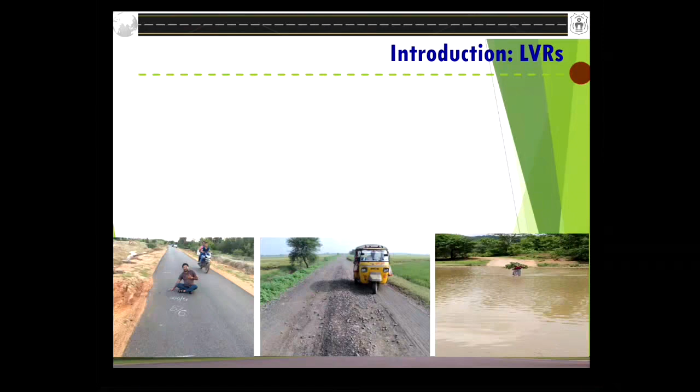When it comes to this, somebody asked what exactly is a low volume road. The nomenclature used in developed countries is low volume road, whereas in India we normally use rural roads, comprising village roads and ODRs, the other district roads. The village roads are roads within the villages. Whatever agricultural production the farmer has produced must be transported to the nearest market center, which requires a higher order category of road so they can easily reach the market center.

One of the ideas I came across in the literature for developing these rural roads in those days was to get the farmer out of the mud. That was one of the mottos. So coming to the construction and design aspect of the low volume road, I always feel it is very easy.

It is easier to design and construct a high volume road rather than a low volume road, because in a low volume road we are continuously striving for cost-effective technologies, cost-effective construction methods, and cost-effective materials, without compromising on the quality and performance of the pavement. Achieving this is not that easy.

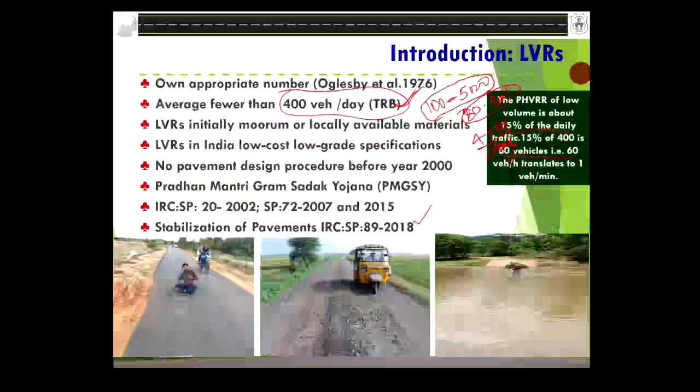Now you all worked within rural roads. Try to recall back. Are there rural roads where we are getting 60 vehicles per hour? Are we getting one vehicle each minute? Try to recall and see.

So that's why 400 vehicles per day is an accepted definition for working of the low volume roads.

So these are the photographs. Mostly you can see hardly the two-wheeler or the auto rickshaw, and this is the picture taken during our visit. A B.Tech girl, two girls of B.Tech, in a remote area village, because of lack of cross drainage structure during the seasons - this is the way they are crossing the road.

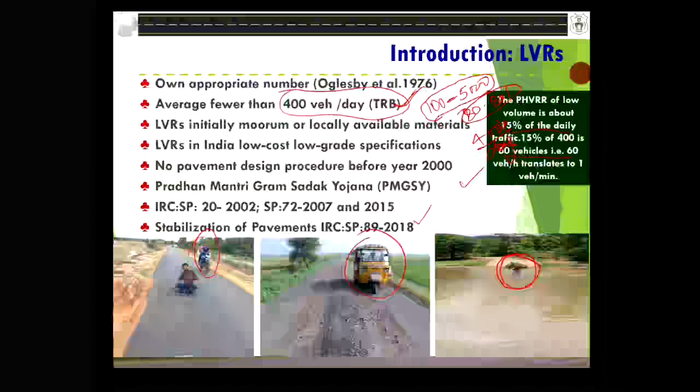We know the importance of rural roads, because livelihood, education, day-to-day activities, employment, agriculture, medical needs, whatever - all really depend upon, our life starts from the rural roads, the low volume roads. So with this background, let me proceed further.

So this is the definition of low volume roads. Another way of looking at it: low volume roads are set by the combination of the typical vehicles using a road and the traffic volume on the road. So simply, weights are divided into light and heavy, and volumes are divided into low and high, with a limit of, as I said, 400 vehicles per day.

So in this picture, please note that if you recall your traditional literature, the sound knowledge available on low volume roads is concerned only with the lower left coordinate of the graph - that's the traditional low volume roads. Whereas in most cases, we also have mining roads, sand, oil, forestry roads, which fall in the upper quadrant. This is also having low volume too. Please make a note of it.

However, the two design environments both have low volumes, but they have vastly different design vehicle weights - that's what you have to understand here. So a low volume road, such as a farm to market road in a developing country, might have a bicycle as the typical vehicle, whereas a mining road might be designed to support 500, 600, or 700 ton dump trucks.

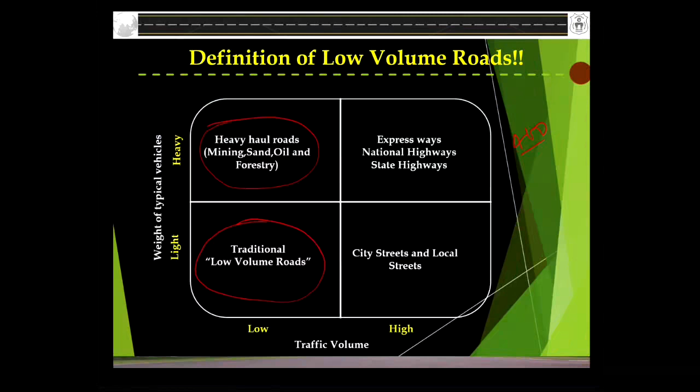So what I wanted to say is that the pavement design aspects of the two design environments are vastly different. That's why I always say that one size shirt cannot fit everyone - we have to stitch the suit as per the requirement. I cannot follow the design guidelines adapted for high volume roads; I cannot construct a 1 meter or 1.5 meter crust thickness. So it's evident that we have to design our pavement as per the requirement, without any compromise on the quality and performance of the roads. That's the background, that's the definition of low volume roads.

So how low is low in terms of traffic volume and weights - that's the concern of these points.

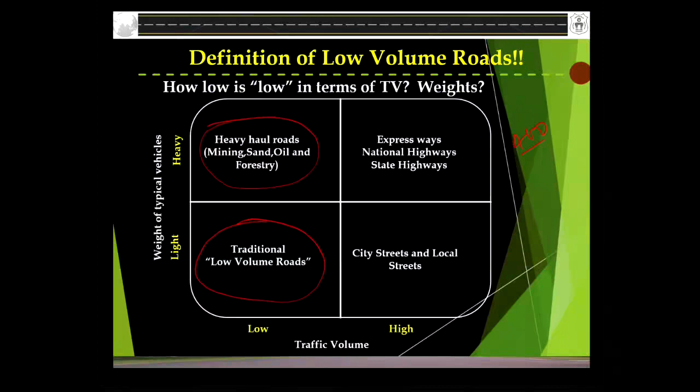So then coming to the next part, sir, talking about the specifications. Before the year 2000, very little sound knowledge was available on the planning, design, construction, and maintenance of low volume roads. But after that, once the rural road PMGSY scheme was started, the first ever kind of manual, the SP20, was published in 2002. The rural road manual IRC SP20 was published by the Indian Roads Congress as the first technical document, and subsequently the National Rural Road Development Agency was constituted for the purpose of providing technical and management support to the Ministry of Rural Development.

Subsequently, we have gotten a very good number of code books, followed by the design and construction of cement concrete pavement for rural roads - IRC SP 62 2004, and the flexible pavement IRC SP 72 2007. Now we are using IRC SP 72 2015, the latest code.

All these code books provide technical and management support to the MoRD. Later, as you are aware, in this process they also developed a standard bidding document, and the quality assurance handbook volume 1 and volume 2.

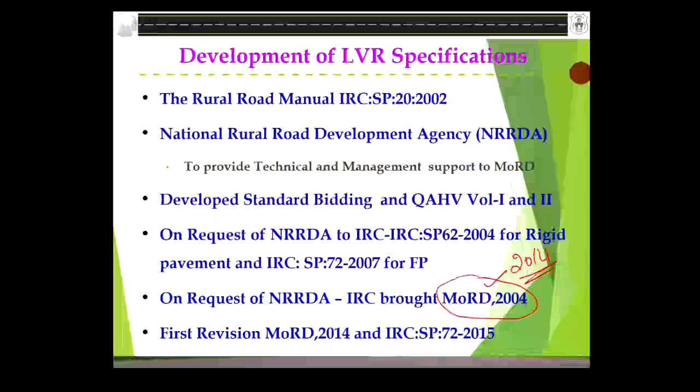During this one decade, there was a lot of development in the country, a lot of experience gained by engineers like you, and a lot of international exposure. That necessitated incorporation of locally available materials, marginal materials, and different road safety aspects into the codal specifications, which necessitated the first revision in 2014, and we are now using IRC SP 72 2015.

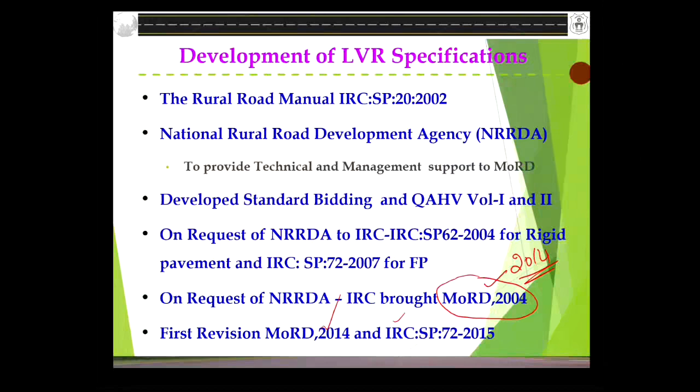So this is the need and the little background of the MoRD specification - why they needed a change and all those things.

Now, before I move into the specification part, let me give you some idea - what quality works mean, and what the role of specifications is.

Sir, everybody feels - what is civil engineering? Anybody can do it. Moreover, when it comes to road infrastructure - what is road? Just excavate one or two feet, bring some material, dump it, compact it, and leave it. Everybody can construct it. But you know what makes a construction specification important, all those things.

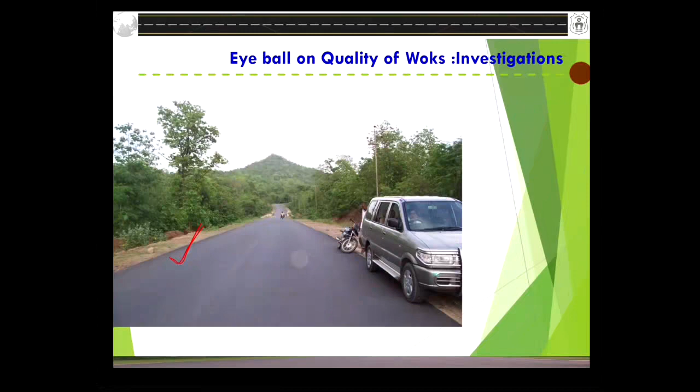This road was constructed and awarded for third-party quality control testing to NIT Warangal. The transportation division does a lot of consultancy on third-party quality for different agencies, so they requested us to do a third-party quality check. We inspected this road and found it to be very good, excellent, no doubt about it. But at some chainage...

While we were traveling or walking on this road, we noticed that there was a small crack that had been initiated on the top of the surface.

Then we asked the engineers what could be the reason, because the entire road had excellent riding quality - we had not found any small crack anywhere else, but this crack was given as a point of concern. I asked the engineers, can we investigate this and see what the problem is? They said it may not have been properly compacted, and this area is mostly blessed with black cotton soil, so the compaction caused the problem in the subgrade base layers. They said they would correct this.

Now, in your opinion, what could be the reason for this, sir? With your experience in the field, is there any clue? Can anybody give a clue? What could be the reason for this, or what is your idea? What is your thought process? Why was this crack initiated?

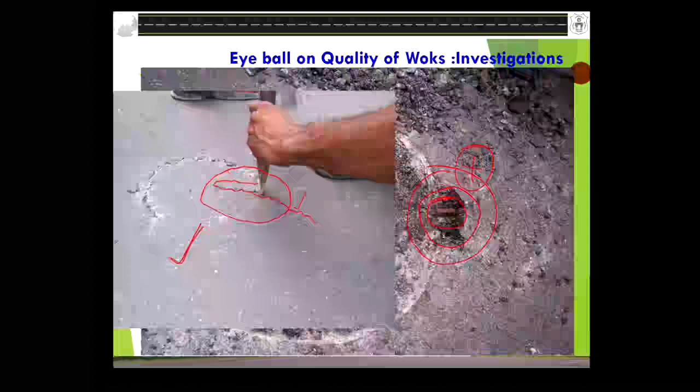So what I'll tell you in the next one or two slides, what are the things in it. We must be very careful while executing the work. See that there should not be any foreign material present in the mixes. Maybe a silly reason, but now this has initiated. This has caused the cracking. That's what I wanted to convey to you.

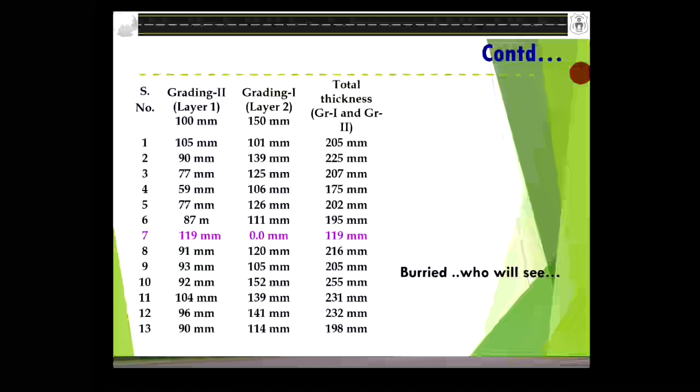And there is a second experience for us. Everybody feels that a road is a structure. We need to bury some materials into this, compact it, and forget about it. It's a buried structure—who is going to worry? You and me, we are going to worry. You and me are going to think about this.

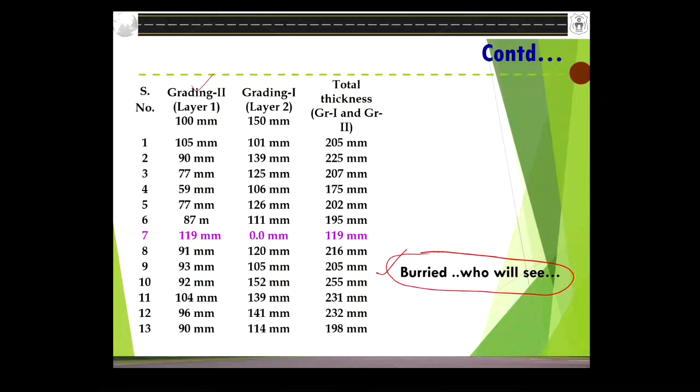So this is another kind of work that we have carried out in Warangal on a consultancy basis. This is the road having two layers, grading 2 and grading 1, layer 1 and layer 2, of 100 millimeter thickness and 150 millimeter thickness, and together it is supposed to be 250 millimeters. Look at the specifications—nowhere is it exactly 250; either it is more than 250 or less than 250. Except this one case, which is 255.

And look at this picture highlighted. At this juncture, the contractors even forgot to lay one layer.

This was a different story. He said that you did not perform the test in our presence. No, nothing happened like this. It was a discussion, but this is the reality. So specifications or material make a lot of importance, a lot of concern for all of us.

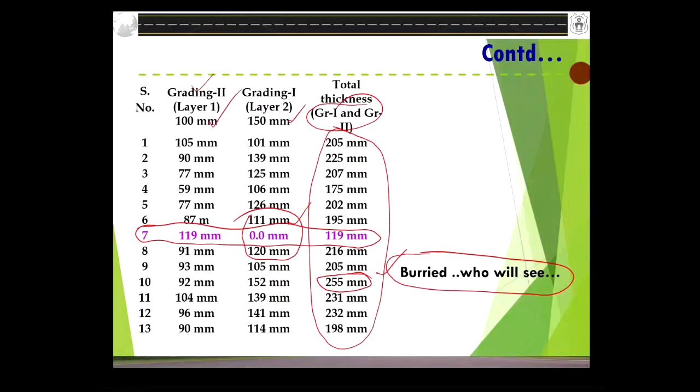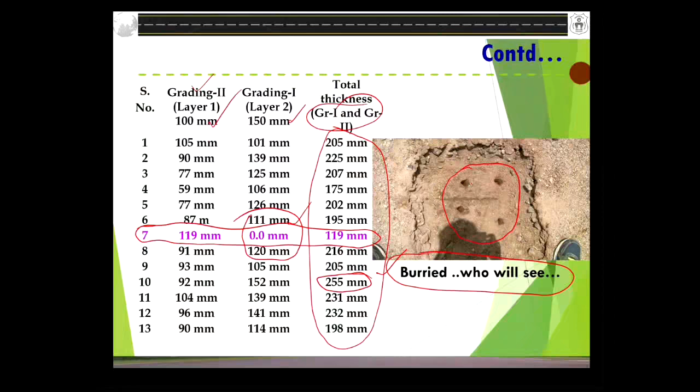So this is the picture. I have excavated the first layer. In the second layer, I myself took a crowbar and tried to hit into the layer where it was. Simply it went penetrating into it, but I could not feel any aggregate present in it. So this is the zero.

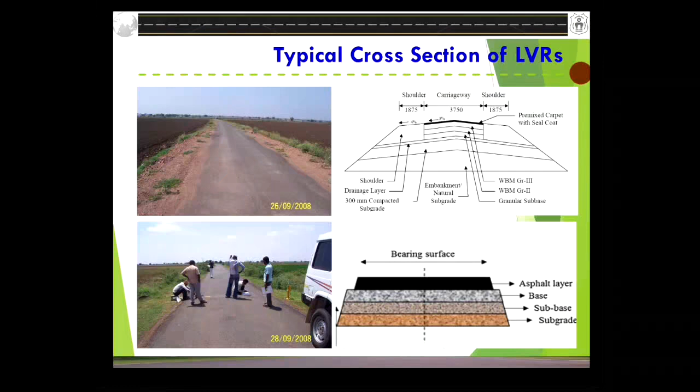So with this background, sir, let us—you and me, all of us—know that these are these typical rural roads, which these photographs show. Yes, we took the photographs during our RRPPS studies. RRPPS, the study initiated by NRIDA from 2007 to 2012. So these are the roads, and most of the engineers have been associated with PMGSY from day one, from the inception. They are very much familiar with this kind of pavement cross sections.

So we used to have a standard cross section like a subgrade, embankment, and subgrade followed by a base or subbase as WBM grade 3, WBM grade 2, as well as a granular subbase course. And the 3.75 meter is the carriageway width on this. This is the typical cross section.

So now in the latest codes of practice, there are a lot of things, a lot of developments and changes that have come into the different layers. Use of marginal materials, locally available materials, and use of cement-treated bases—all these things have been incorporated, and we are witnessing this today.

So our entire life will be revolving around these layers—what should be the best material, what should be its properties, how they withstand different traffic and environmental conditions. Our life is going to revolve around this pavement cross section, and see that at the end of the day, the road serves the purpose for which it was designed, intended, and constructed.

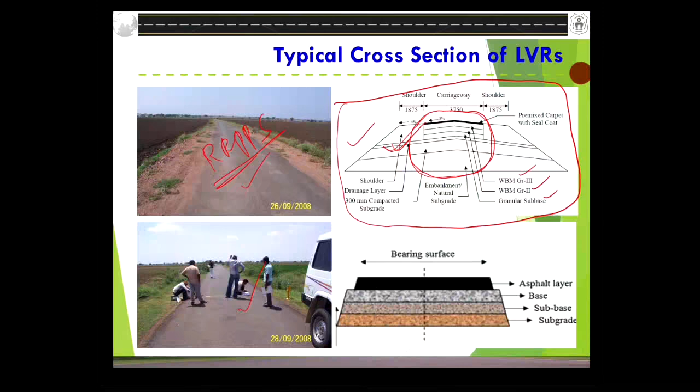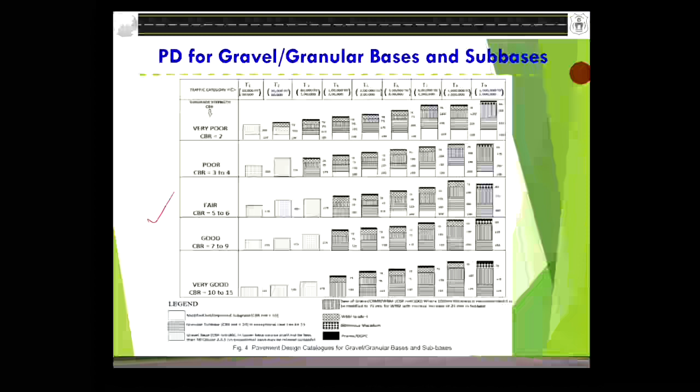Now let me give you a brief idea. Let me go further now. What are these supplements? New supplements that have been added from the 2004 MoRD specifications to the 2014 MoRD specifications. What are the general changes in the MoRD specifications?

So these are the sections. Section 400 and 402 supplemented within gravel and soil aggregate subbases. Section 408, 410 on local and industrial material, which were not there earlier. So this has been incorporated.

Also the semi-dense bituminous concrete and waste plastic has been put in place now. And also followed with structural steel, vented causeways, bridges, long span bridges, their bearing aspects, CC road maintenance, traffic signs, and most importantly, material, environmental, and social safeguard, which is a magic term we are calling road safety.

So in terms of that, how to safeguard the environment and social safeguard, few aspects have been incorporated into this. In addition, a lot of quality control tests and quality control equipment have been added to the latest code of practice. I will be highlighting these changes wherever they are done, and whatever is not highlighted or listed is as usual maintained and continued from the earlier code of practice to the current one.

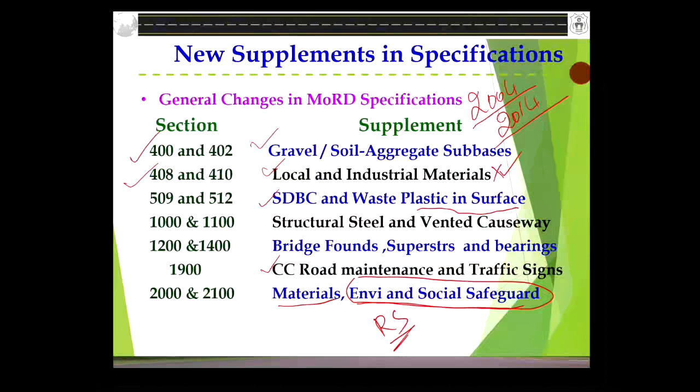This code of practice also found two bituminous constructions phased out. One is the built-up spray grout, as well as the modified penetration macadam. The built-up spray grout was recommended as a base course, and I think it is a 2-layer composite construction with single size aggregate, which is compacted on them.

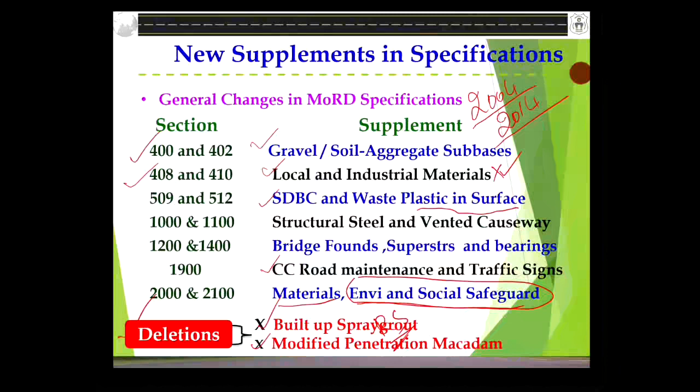Both these were found to be susceptible to penetration, open kind of mixes, and water gets entrapped in them. So this has not found any place in the latest revision of the IRC MoRD specifications of 2014. And this is also given.

I was telling you what are the materials - embankment, subgrade, unsuitable materials, and the requirements. Sir, I was showing the case study on unsuitable materials and how to be careful. If you present any kind of foreign material, such kind of things, those were the results.

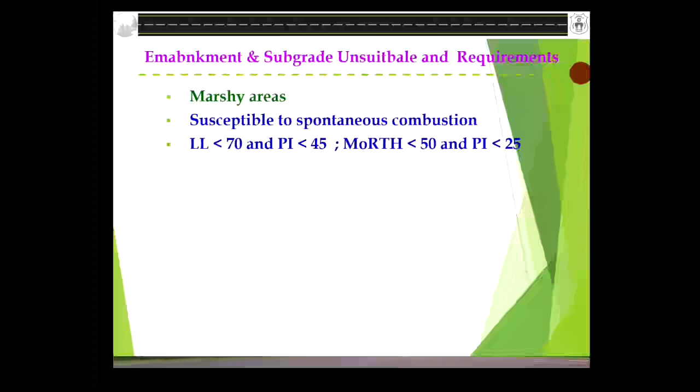So material from marshy areas is not recommended. They should be free from peat or perishable and other organic materials. Also, the material should not be spontaneously combustible. And they said liquid limit should be less than 70% and plasticity index less than 45. If you look at the MoRTH specification for higher order roads, they say liquid limit, the Atterberg limits, should be less than 50, and plasticity index should be less than 25.

Also, soils having salts, which we call sodic soils, having a pH value greater than 8.5, are not at all suitable, not at all recommended for any subgrade or embankment construction. Also, free swell index - a soil having free swell index more than 50% should not be used as fill material.

In case you feel there is no alternative and you have to use it, the code has given a concern: on top of the 500 mm portion of embankment, and below the subgrade, you have to ensure it should be non-expansive in nature. That's what they have mentioned.

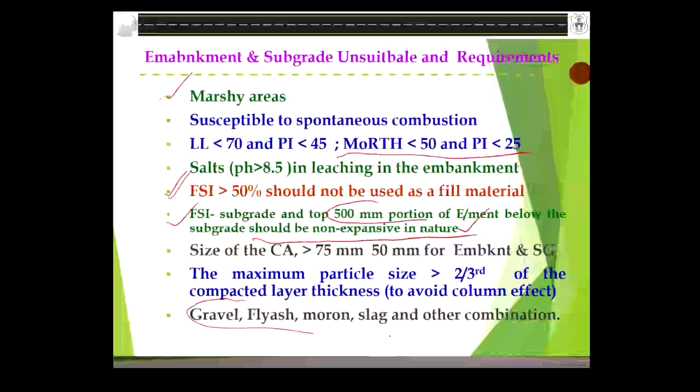In the embankment and subgrade, the common materials used are soil, moorum, gravel, fly ash, slag, or any other material, or a mixture or combination of these materials for construction purposes. When using these, the density requirement for compaction of embankment and subgrade applies - for embankment not subjected to flooding, embankment subjected to flooding greater than 3 meters height, and also subgrade, earth shoulder, and backfill.

You can see here 14.4 kilonewton per meter cube. This is the maximum laboratory dry unit weight when tested as per our IS Proctor test. So they said that 14.4, 15.2, 16.5 kilonewton per meter cube respectively should be maintained and should be obtained.

So when it comes to compaction requirements, for subgrade and earthen shoulder, it should not be less than 100%. When it comes to the embankment, not less than 98%. Whereas in the earlier code in 2004, they said it is 97%, but based upon the experience and performance of the things, they said it must be 98%.

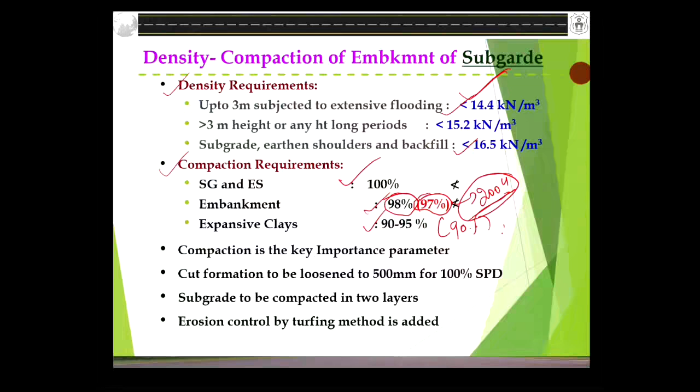Similarly, we know that expansive soils are predominantly the BC soils. They behave very erratically in summer, erratically in winter, in different seasons. For them, earlier it was mentioned only 90%, if I'm not mistaken. But in the latest code revisions, they said the range has been given as 90 to 95% for expansive clays.

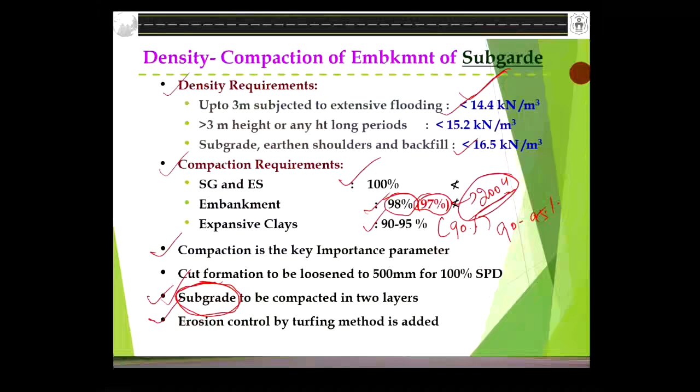Now, when it comes to layers from the top, the embankment and subgrade, the next layer is our GSB layer. As I told you, our entire life as an engineer will revolve around using this kind of traffic. So we know the subgrade, subbase, base course, followed by a bituminous course, whereas in rural roads now people are using SDBC or BCU in some areas.

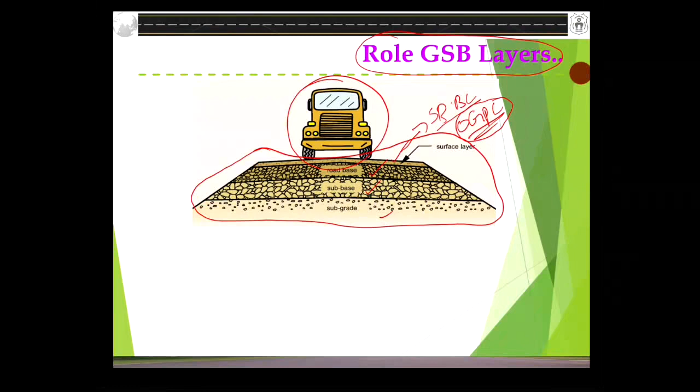But earlier, predominantly we used an open graded premix carpet of 20 millimeter, which is not treated as a structural layer - it is just a dust palliative layer, and there is no mix design procedure. It is simply a recipe of mix, adding some 3 to 3.5% bitumen on those things. We will cover this part a little later on the third day.

Now let us consider this - what are the functions and role of the granular subbase layers? You are aware the main function is they should provide drainage stability.

Sir, if you recall our undergraduate level course on transportation engineering, pavement engineering or highway engineering, we go from the bottom to the top using low quality material moving to superior quality materials. Predominantly in the subbase layer, we use slightly inferior quality material, whereas in the top surface and base course, we use very superior quality material as they take the load directly from the traffic.

So their role is to distribute the traffic loads coming on the different layers safely onto the subgrade without any excessive deformation, rutting or damage of the pavement. The subbase is predominantly provided as a drainage layer, and we also need to take care of the capillary effect, that is the saturation of subgrade due to the groundwater table. The other layers should also protect the subgrade, reduce the stresses coming over it, and improve the load bearing capacity. Also, one more important point is the initial stages.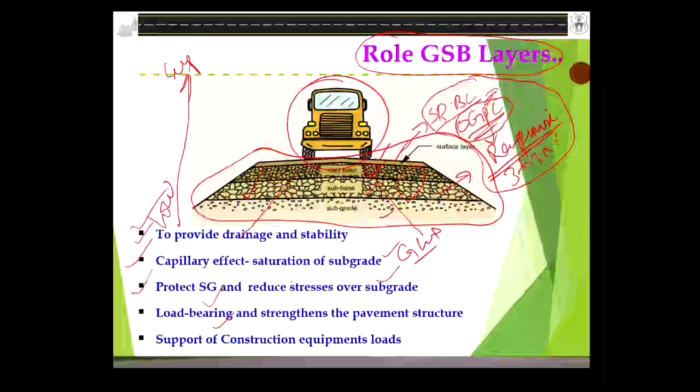There are some sites, some areas, which are not even capable of supporting initial construction traffic. So they should provide support for construction equipment and construction loads. To fulfill these objectives, we use different kinds of materials. What are those materials? These are the materials you're all aware of.

Natural sand, crushed gravel, crushed stone, crushed slag. Natural sand is a rock mineral finer than gravel in size. Crushed gravel is also similar to crushed slag. There's crushed stone, and crushed slag, which is obtained from the steel industries and such places.

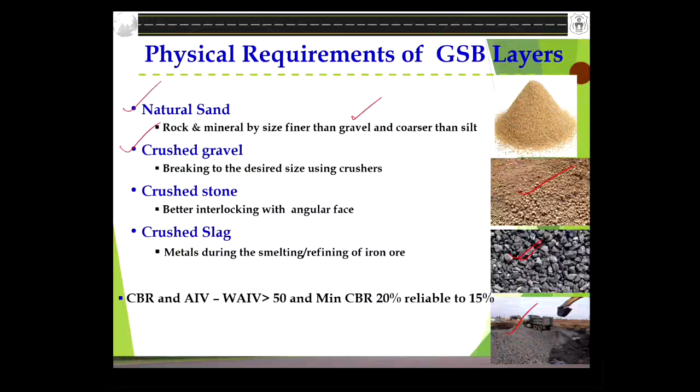Also, we consider the CBR and the wet aggregate impact value. The wet aggregate value should be greater than 50, and the minimum CBR is 20%, which is relaxed to 15%. What does this mean? We said that the CBR value of the sub-base should be 50%, or 20%.

In some areas, it may not be possible to get good quality materials. In those cases, the code has given a relaxation that the reliability can be up to 15%. In areas where only soft aggregates or soft local materials are available for construction, the code recommends performing the wet aggregate impact value test under 72-hour soaking conditions. After the 72-hour soaking, if the wet aggregate impact value is still greater than 50, then that material can also be used in the construction process.

So you have to remember all these things. As Professor Prasad sir mentioned in the morning, there has been a lot of development in rural road construction technologies today. We are all facing a crunch, a natural scarcity of pavement materials. I'm sure if you move another 30, 40, 50 years, we will definitely be facing severe scarcity of pavement materials. We are witnessing this already, as those involved in the PMGSY scheme from Phase 1 since its inception till today are aware.

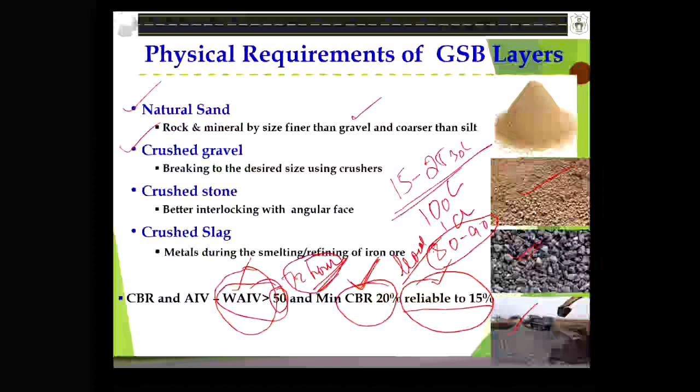So on one side, this is the issue. On the other side, the country is abundantly blessed with alternative local materials. But fortunately, unfortunately, as I always say, God has not created all of us the same height, weight, and color. So whatever material is available cannot be straight away used for construction, unless we make a little effort in treating these materials—at least 50-50 replacement or 60-40 replacement, something like that. Then we can save nature, save cost, and also save the future younger generations, so they don't say 'my father and mother used up everything on this planet and left nothing for us.'

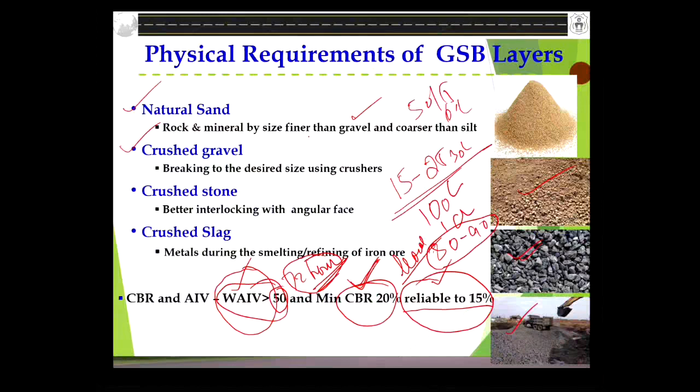So that's the requirement behind using natural sand, crushed gravel, crushed stone, and such materials.

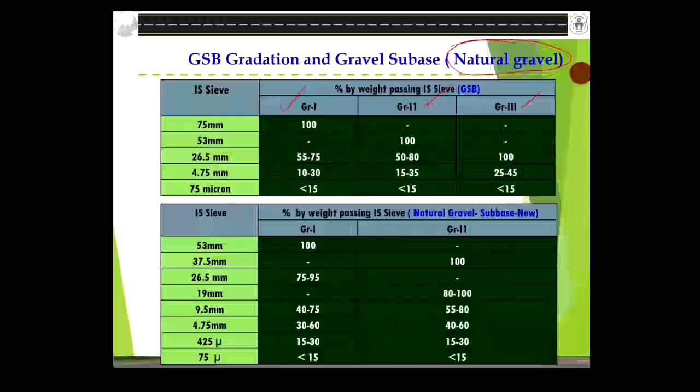Moving further, the latest code of practice has introduced two new gradations: the granular sub-base gradation and the gravel sub-base. This gravel sub-base is the natural gravel type—grade 1, grade 2, and grade 3—also for the sub-base layer. Grades 1 and 2 are the natural gravel within the sub-base. This is a new incorporation in the granular sub-base layer, and you can see the corresponding sieve sizes and gradation sizes.

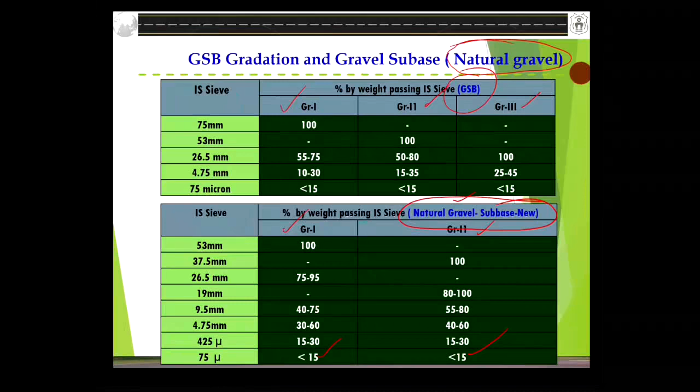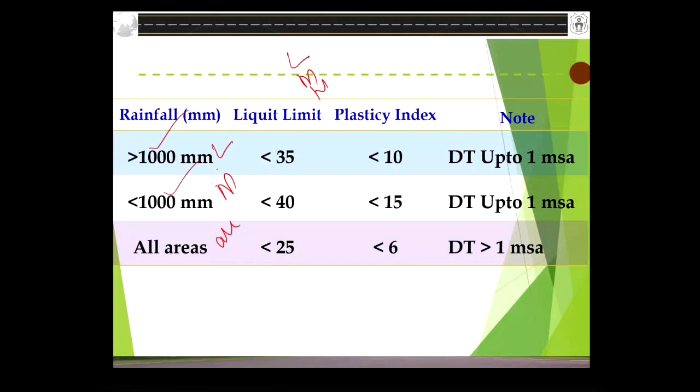They also specified that for clay subgrades, the material passing the 75 micron sieve should not exceed 15%. Also, they have given rainfall categories—earlier this table was not there. For this gradation, they have given three rainfall areas: low, medium, and high rainfall, classified as greater than 1000 millimeters or less than 1000 millimeters. Irrespective of the area, your Atterberg limits and plasticity index values are specified, along with some notes given accordingly.

For this, you can design for traffic up to 1 million standard axles, and also design traffic greater than 1 million standard axles. As I told in my opening remarks, in India, low volume road means a road carrying up to 2 million standard axles, as per IRC SP 72 2015, the latest version. As per IRC SP 72 2007, it was 1 MSA.

If you recall IRC SP 20, we have categories A, B, C, D, E up to 450 vehicles per day. This was the year 2000. Now we are also calling the minimum a road which carries 2 million standard axles. In the earlier code, if any road exceeded 1 million standard axles, we used to recommend either designing it for 1 million standard axles using the same code of practice, or going for IRC 37 2012 or 2018 for flexible pavement design.

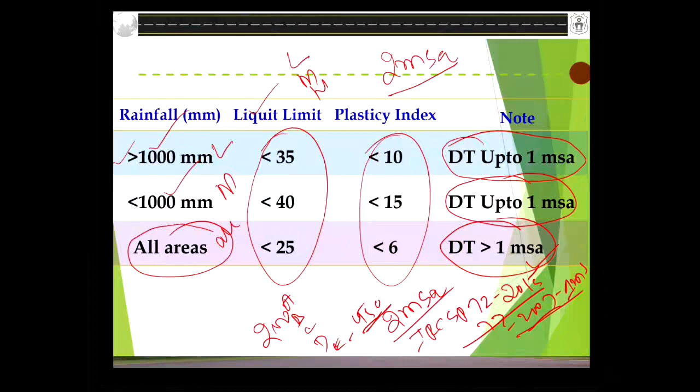Which is not my cup of coffee as far as rural roads are concerned. So now also, a road which exceeds 2 million standard axles - I don't see that happening except in rare cases, like an industrial area, or sand quarries, iron quarries, or something else. Otherwise, there's no question of rural roads exceeding 2 million standard axles if you properly establish the traffic volumes and do systematic, scientific analysis. But this is the guideline that has been given to us.

PI for the granular subbase layer, which has been newly incorporated into the code of practice. Here also, minimum CBR is 20%, and if the granular subbase doesn't meet the economic needs, they said 15% relaxation has been given for engineers to take care of those things.

Another new incorporation is a modified definition for gravel. The new modified definition says natural gravel - if you try to have it, it will be not less than minimum 30% CBR, up to 80% CBR kind of materials available. So natural gravel is a mix of crushed stone, crushed gravel, crushed slag, moorum, sand, fine-sized particles, or any combination of these. This is the definition given in the new guidelines.

As I told you, we have a classical cross-section of the flexible pavement. In the subbase layer, which is supposed to be a drainage layer, they have divided it into two parts: lower subbase and upper subbase. The lower subbase acts as a drainage layer, and the upper subbase acts as a separation layer, with minimum lower subbase having 50% CBR and upper subbase having 80% CBR.

Here also, the wet aggregate impact value shall not exceed 40 and 50, 40 and 30 respectively. Flakiness index 25 and 20% for base and surfacing courses. And in this, if by any chance the required material - gravel, soil aggregate mixes as subbase material, base course, and surface material - fails to meet the requirement, they say go for gradation by blending. That blending by crushing, screening, and mixing should be done mechanically, by in-place mix method, as recommended in the MoRD specifications.

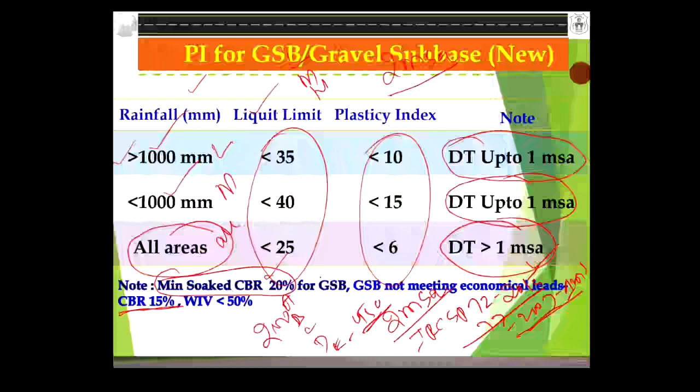Right, okay. Now, earlier I said that the sub-base course minimum CBR value is 20%. For the GSB, if it is not meeting the economical need, it is relaxed to 15%.

Now, in this code, what is gravel or soil aggregate? Gravel or soil aggregate sub-base, base, and surface course also. In this case, the sub-base is included in the new revision. This sub-base includes two things: lower sub-base and upper sub-base. The lower sub-base acts as drainage, the upper sub-base acts as separation. This material should have 50%, and this material should have 80% in case of the gravel soil aggregate mixtures.

That's what the inclusions are. But naturally we are using very superior material in the sub-base. Actually, we must use a bit inferior material, which must have CBR at least up to 20%. But if we are using material of CBR up to 80, then we are not economizing. Yes, that's what the code has recommended right now.

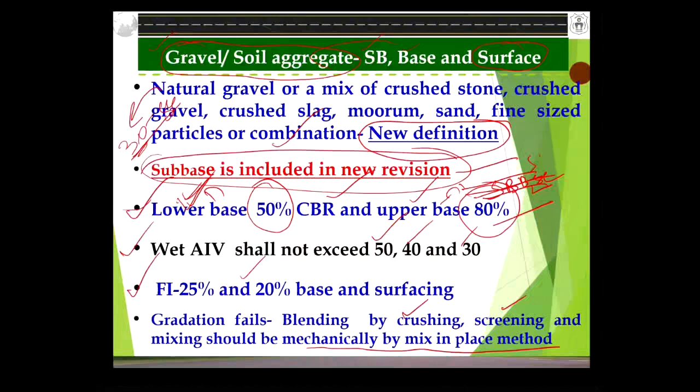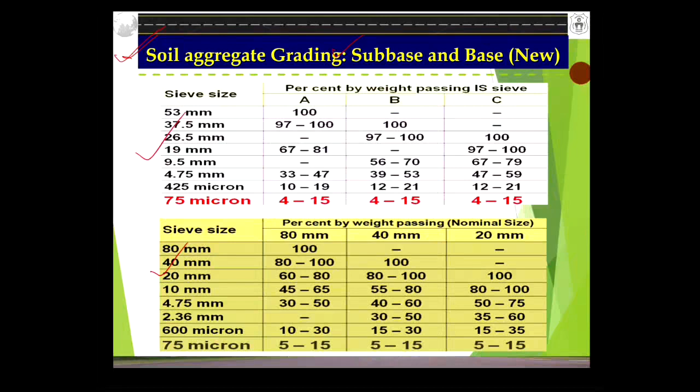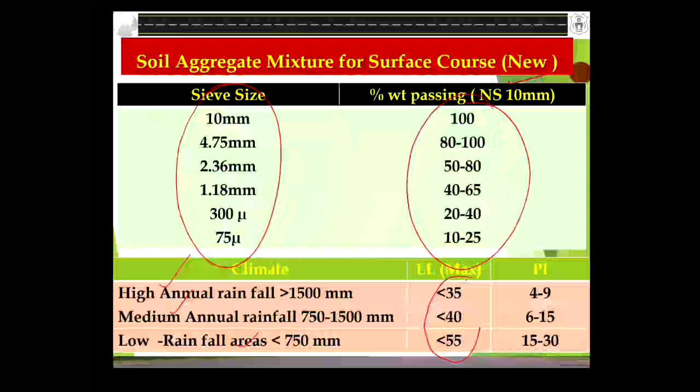So let's move further. This is the aggregate gradation for sub-base course and base course. This is a new inclusion compared to the 2004 and 2014 codes. There is also a soil aggregate mixture for the surface courses, with a nominal size of 10 millimeter, given for high rainfall area, medium rainfall area, and low rainfall area. It has to meet the liquid limit and plasticity index requirements. So this is what about the changes incorporated in the code of practice of the MoRD specifications.

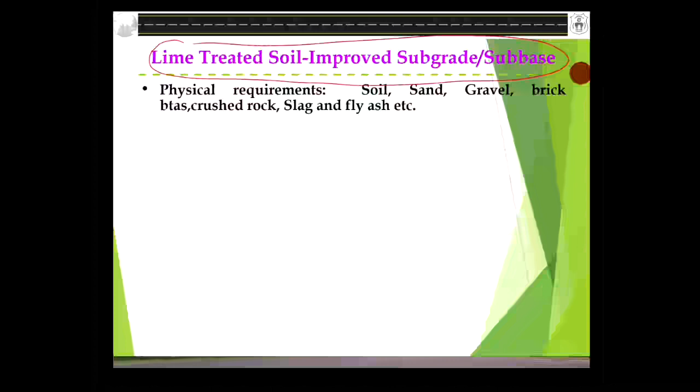Now comes the lime treated and soil improved subgrade. As rightly said, wherever material scarcity is there, when you are using locally available material which is not meeting the required specifications, the code recommends treatment of the subgrade, sub-base, and base courses. In this requirement, they give physical requirements for soil, sand, gravel, brick bats, crushed rock, slags, and fly ash.

Earlier it was mentioned as cement treated sub-base and base course, but now in the new revision, they say cement stabilized sub-base and cement stabilized base course. They also give ranges: if using cement stabilized bases and sub-base courses for sandy soil or soil gravel, the soil cement range should be 3 to 5%. Silty soil with plasticity index greater than 30 is 4 to 8%. Clay and BC soils are 8 to 15%.

BC soils with PI greater than 30 must be addressed with two-stage stabilization, that is lime stabilization as well as cement stabilization. Soil which is not responding, not getting improvement with lime, you can go for a second treatment with cement stabilization, adopting this tentative approach.

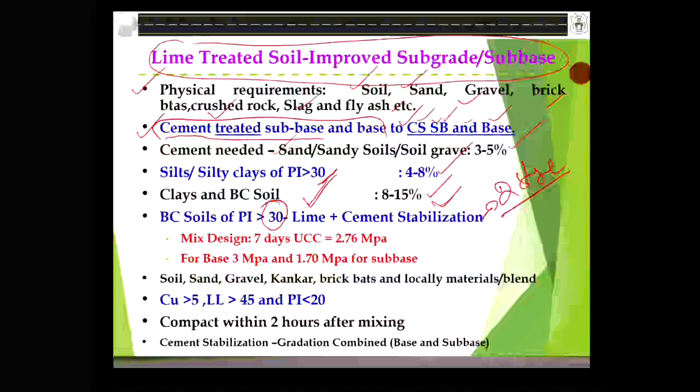This is the range of values given for cement content. Also, the mix design for lime treated material must be confirmed in terms of UCS value. Mix design 7-day UCS is turned 2.76 MPa for base, 3 MPa, and 1.7 MPa for sub-base courses. Also, soil, sand, gravel, kankar, brick bats, and locally available material can be blended, and compacted within 2 hours.

The cement stabilization, earlier the code had given something different. In this code, they have merged into only one table, starting at 53, 37, 26.5 for the base and sub-base courses. The cement stabilization has been adapted.

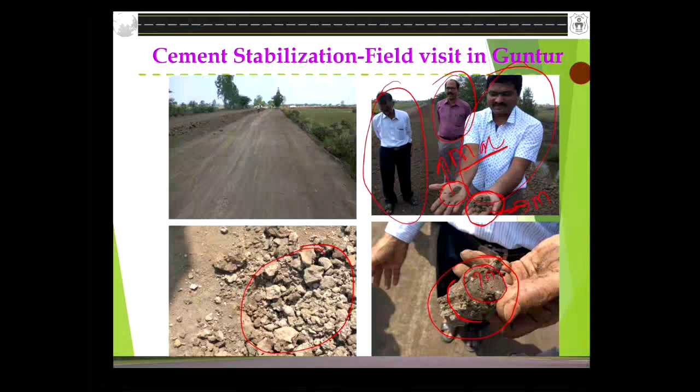Is it the fault of the engineer, or the fault of the mix design, or the fault of the execution? Nothing. What we feel is, in India, even today, if we want to do a stabilization with cement or a chemical or bitumen stabilization, unless we have state of the art machinery equipment which can pulverize this kind of clods into powder form and add to the cement, I think we will get this kind of results only.

That's my gut feeling. Unless we use state of the art machinery, right now what we are using is hardly rotavators, or hardly disc harrows, or tractor-towed cultivators.

But these cultivators have got their own limitations. They may not be pulverizing this material to the required powder form. So this is also one of the main reasons for the non-success of cement stabilization or lime stabilization, especially when dealing with problematic subjects like expansive soils or BC soils.

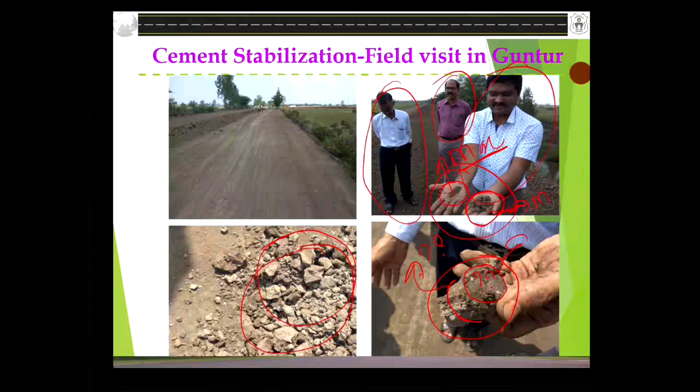Finally, we have recommended something to them. They have done it, and after that we also asked them to include geotextile materials so that it enhances the pavement performance. Some solution has been given, but this is the reality and this is the fact.

That is as far as that concern goes. And as far as the granular courses are concerned, for sub-base and base course, the traditional things - WBM sub-base and base surfacing - no changes. WMM as a base course is adopted. One new thing is these two things which have been added.

We will discuss more about these two things in terms of marginal materials or industrial materials - how to characterize them, what are their properties, what are their quantifications. We'll talk on the third day, in the last lecture, about marginal materials, which will also be given by me.

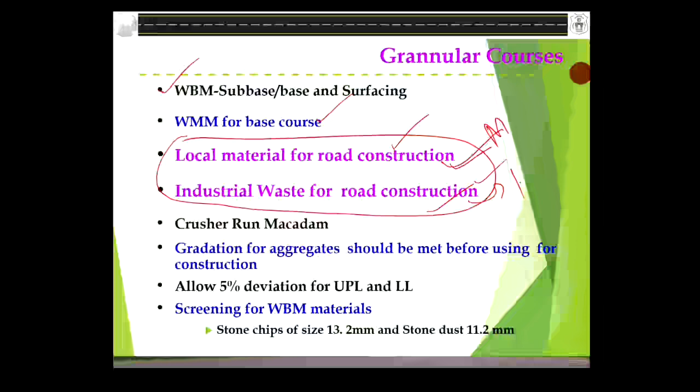A lot of local materials have been suggested. Industrial material has also been suggested. Something good - use of waste plastic has also been given. Crusher run macadam, and the gradation of aggregate should be met. They also allowed a 5% deviation from the upper limit to the lower limit of the gradation.

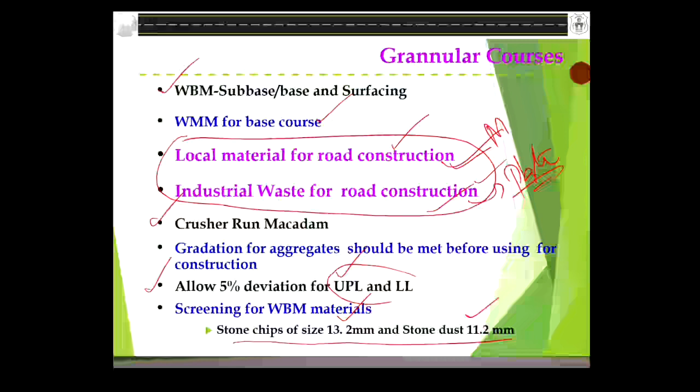And the screening material for the WBM binder - stone chips of size 13.2 mm and stone dust of 11.2 mm all aggregates has been introduced as a continuation to the traditional granular base courses and sub-base courses.

Now coming to that, we have discussed the embankment, subgrade, treated granular layer, followed by the bituminous pavement, the prime coat, and the granular surface. You know that the bituminous course now being adopted on rural roads was earlier OGPC, open graded premix carpet, but now some states are adopting even BC.

In Telangana, BC has been given. Some states are adopting semi-dense bituminous concrete, and some states are adopting some kind of surface dressing or a mixed seal, something like that. So basically it's a primer, slow setting emulsion, cationic emulsion is used.

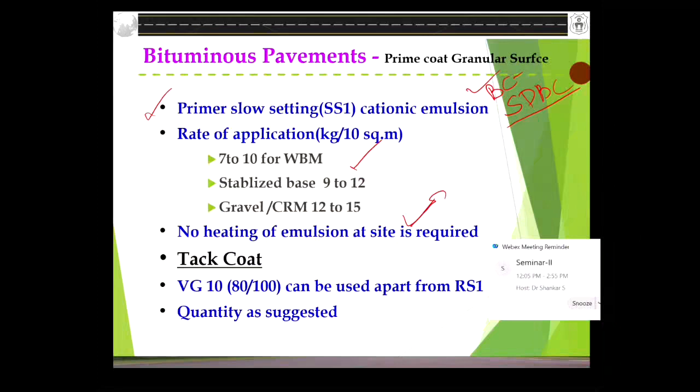The code has recommended rates of application for the coat, and cold mix technologies have also been recommended - this also we'll talk much about on the marginal materials day, which requires no heating at the site. The tack coat of VG10, 80 by 100, is used apart from RS1 as the quantity suggested in the code of practice.

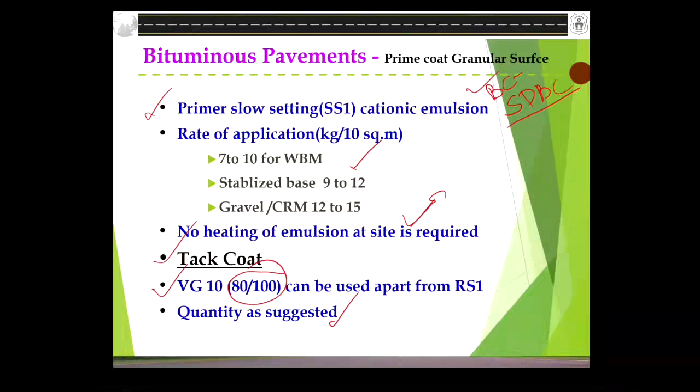We know that bituminous macadam is an open graded mixture. The new suggestion is that in cooler regions, the bitumen content can be increased by 0.5%, for 50 to 75 mm layers, using paving grade bitumen VG10 to VG30. They say 3.3 to 3.5% for the crushed aggregate hot mix asphalt.

Modified bitumen is not recommended, but the aggregate properties, grading, and bitumen quantity have not been changed much; they remain more or less continued. The new inclusion is in the mixing, laying, and rolling temperatures.

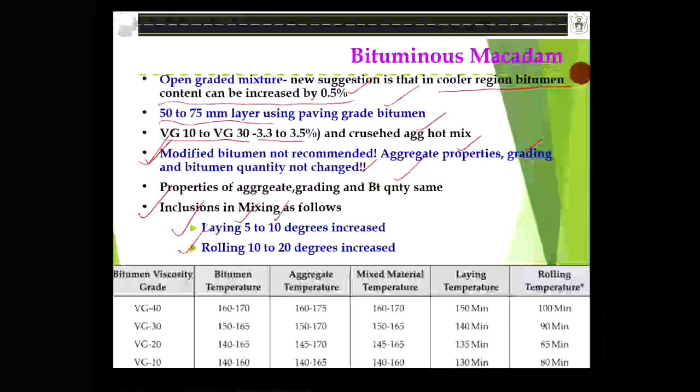The laying temperature was increased by 5 to 10 degrees centigrade, over 10 degrees. Rolling temperature is increased by 10 to 20 degrees. As we are all aware, we follow a viscosity grade of bitumen, and we know the bitumen temperature, aggregate temperature, mix temperature, laying temperature, and rolling temperature - these are the things we receive in the construction process.

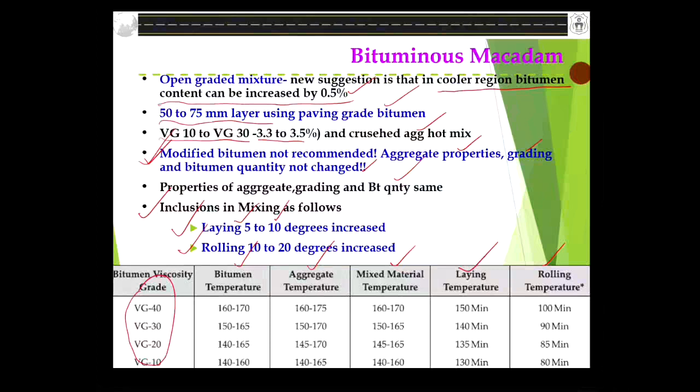But at least in my experience, if the minimum specified is 100, it is around 80 at the site. It says laying temperature should be 150; I have noted it is about 100.

This is because sometimes our rural roads are in interior areas, and the mix plant is located about 50 to 75 kilometers away from the road. By the time the truck loads and arrives at the site, the bitumen and aggregate temperature might be maintained, but the rolling and laying temperatures are not maintained exactly. This is also one of the main reasons for premature failure of the pavement.

We can see in urban areas too, when they overlay a road, the very next day some mixture patches or there is a lot of raveling, because the temperature is not maintained. That's why I read elsewhere that the mix plant should be located within a radius of 20, 25, or 30 kilometers - some such limit has been imposed so that this kind of practical difficulty can be avoided.

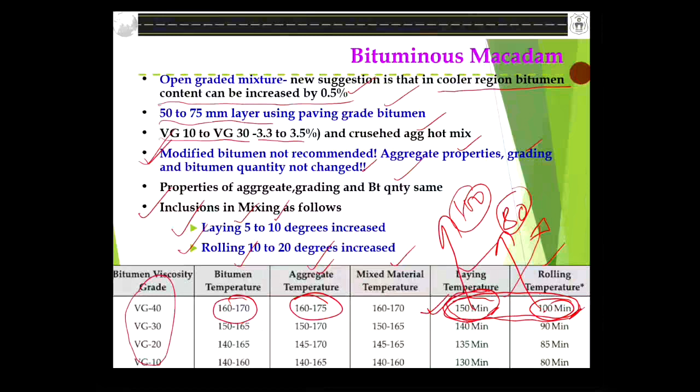Earlier it was a surface course in the MoRTH, but now this has not found a place in the MoRTH, though it is used in rural roads. Now we are using SDBC wearing course using waste plastic as the new recommendation.

For bituminous pavement distress, the finer cracks and wider cracks are treated differently. Finer cracks use SS1, slow setting emulsion. Wider cracks are filled with stone dust, which is finer than 4.75 mm.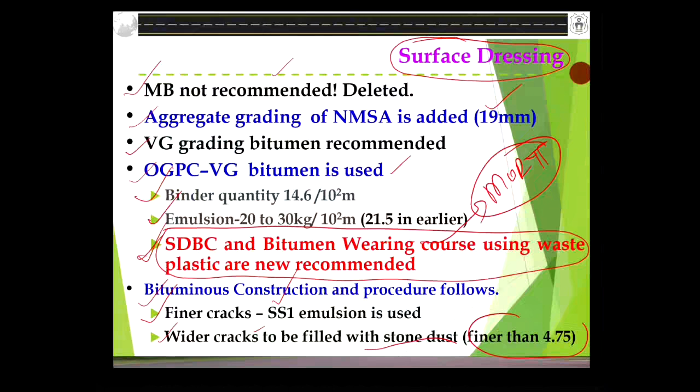The code also gives the semi-dense bituminous concrete mix design requirements. Earlier, as I said, OGPC doesn't have any kind of mix design, but semi-dense bituminous concrete has a mix design, so the requirements are given.

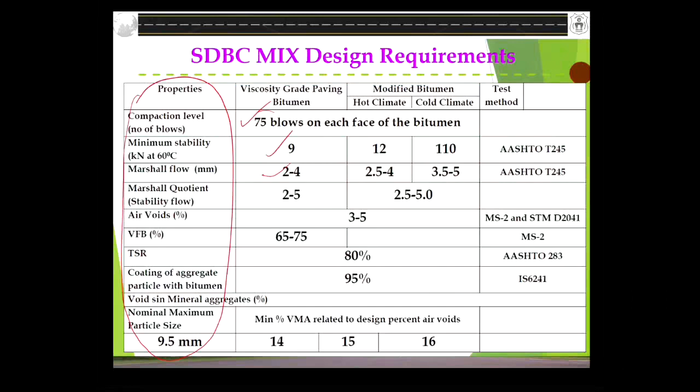So 75 blows on each side of the Marshall specimen, 4-inch diameter, and the minimum stability is 9 kilonewtons, along with the Marshall flow. These are the parameters that need to be ascertained in the laboratory while designing semi-dense bituminous concrete mixtures adapted for rural roads.

When it comes to the other parts, these are all related to granular layers, granular subbase layers, and so on. There are also a lot of changes given in terms of more bridges for the CD works and bridge works.

Stone and concrete blocks - a 200 mm concrete block of minimum strength 10.5 MPa is added. There's a change in cement content and the grade of concrete added too - M15 to M45. In the old code it was M10 to M30; now it is M15 to M45.

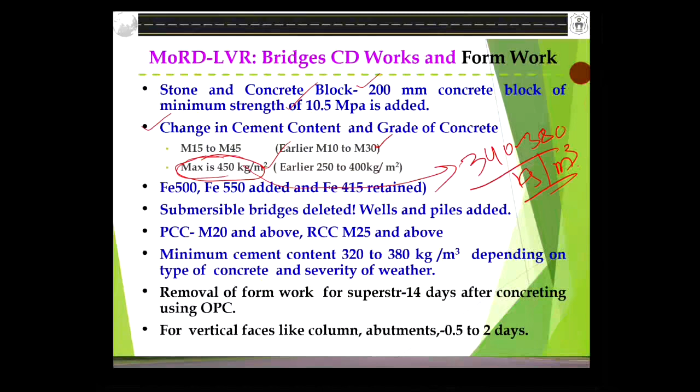We are all witness to that on the rural roads now. The submersible bridges are deleted, and we have added long span bridges, wells, pile foundations, and vented causeways, as the low level causeway has been deleted and submersible bridges have been deleted. Good well foundations and pile foundations have been added.

Minimum cement content, as I have given, is 320 to 380 kg per meter cube, depending upon the type of concrete and the severity of weather. Removal of formwork for the superstructure is 14 days after concreting with OPC. For vertical face columns like abutments, it is only half a day to 2 days.

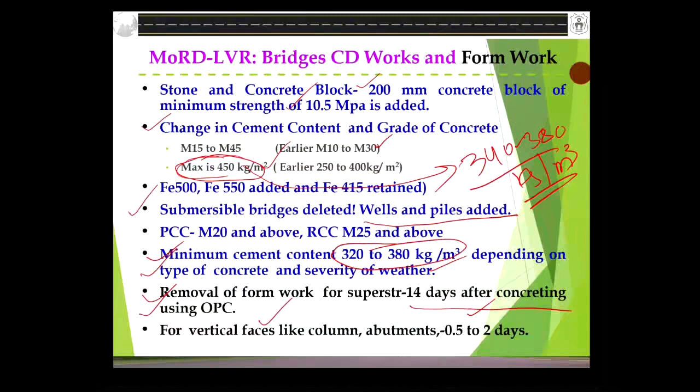Steels, use only new steel for the work. Don't use re-rolled steel. No more re-rolled steel. Use only new steel.

For pipe culverts and vented causeway bedding pipes, there are two types given. Type A is fill more than 4 meters, Type B less than 4 meters. Also NP3 or NP4 RCC pipe, of 900 mm diameter, exceptional cases 600 mm or 750 mm diameter.

If the cement concrete pavement is constructed over a causeway of 200 mm thick, they said M30 or more concrete, camber of 2.5%, and joint spacing of 4 to 6 meters. No submersible bridges if the velocity is greater than 6 meters per second.

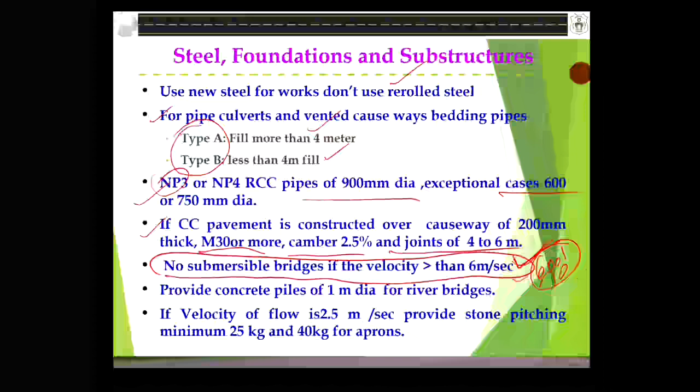This is very straightforward. At NIT Warangal, I think we have cleared around 600 to 700 long span bridges in the states of Telangana, Andhra Pradesh, and also some other nearby states. We have cleared these things. I think all the rural roads are now getting very good high level bridges.

Also, where the velocity flow is less, stone pitching is provided, a minimum of 25 kg, and 40 kg for the apron.

Excuse me sir, how can we provide a camber of 2.5% on a causeway? Usually we have cross fall in case of causeways. We can't provide camber on a causeway. Why, sir, why is it not possible? We have to ensure we improve the cross slope only, camber 2.5%.

If you are using a concrete pavement over a causeway of 200 mm thick, I think we can provide the camber, sir. There could be some difficulty.

Yes sir, usually we have slope on only one side, that means cross fall. In case of causeways, on the upstream we have the edge on the higher side, and on downstream we have the edge a bit lower than the upstream.

Sir, your voice is breaking, sir, a little bit. Sir, actually I meant to say that usually on the upstream side, the edge of the pavement is a bit higher, and on the downstream side the pavement edge is a bit lower.

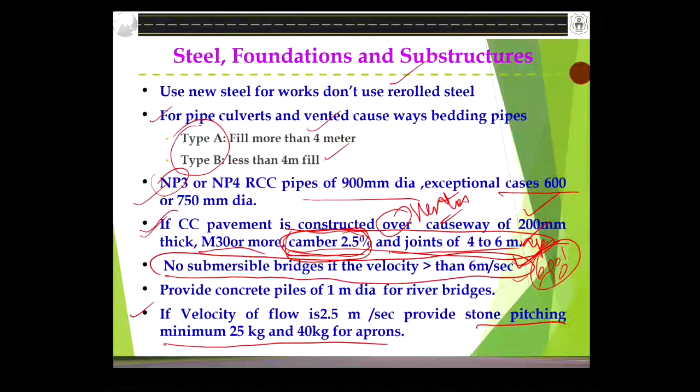As far as cement concrete pavement is concerned, there are also a lot of changes. Earlier OPC 33 grade was used. Now OPC was removed, Ordinary Portland Cement 33 grade was removed, and PPC or slag cement of grade 43 or grade 53 has been recommended, and it is mandatory.

Now it is compulsory to use fly ash with the 53 grade made optional. For 43 grade, fly ash use is also optional. Fly ash usage is allowed. This is one of the things regarding fly ash.

The fly ash you are using should conform to the IS code specifications. As far as cement content is concerned, 425 kg per meter cube maximum and 350 kg per meter cube minimum is recommended.

The earlier code specified 310 kg by the MoRD and 360 by the MoRTH specifications. There is also a lot of debate on this: what is the replacement, cement replacement by fly ash? This code, MoRD, says 30% is the maximum. But if you look at international literature, and Indian literature too, there is nothing final like 30%. Somebody says 50-50, somebody says 60-40, somebody says 20-80. But the MoRD specifications mention 30% as the maximum, and earlier no maximum was given in the MoRD, and MoRTH said 20%. So after fly ash additions, these are the changes.

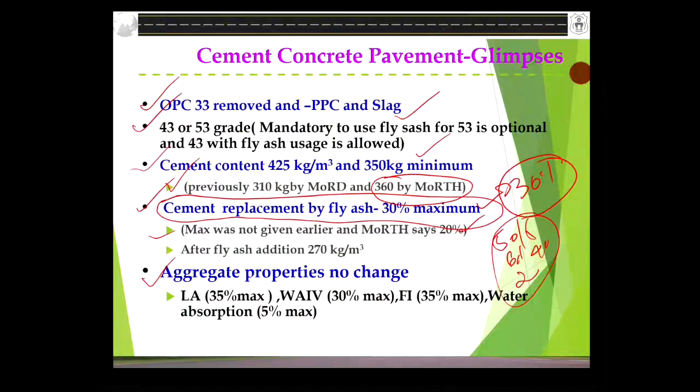For aggregate properties, there is no change. As we see, the Los Angeles abrasion value maximum is 35, wet aggregate impact value 30, flakiness index, and water absorption maximum 5%. No change in water absorption either.

As far as plain cement concrete is concerned, the maximum size of aggregate has reduced from 31.5 mm to 26.5 mm, for M30 grade, with 28 days curing and 0.38 water cement ratio, then the slump is 30 plus or minus 10. Another important thing introduced is treated marginal materials.

This is one thing which has been incorporated in the code: the marginal materials, what treatments and what options are available for those materials. We'll discuss this part a bit later.

They also introduced roller compacted concrete. You know that roller compacted concrete is slump zero concrete. So they've given cement content as 425 kg per meter cube, and 350, earlier it was 310. Also the transverse contraction joints are at 4 meter spacing. Earlier, for PQC, it was 2.5 to 3.75 meters.

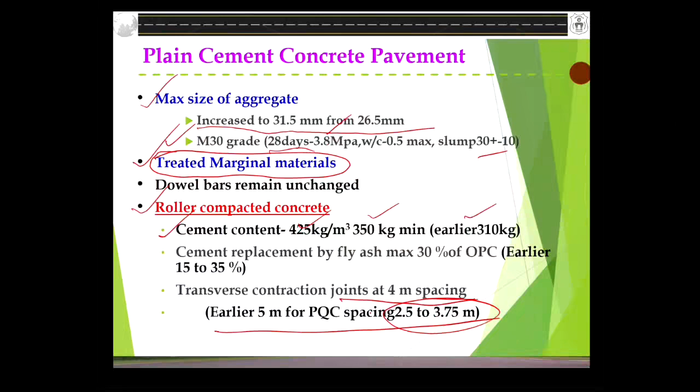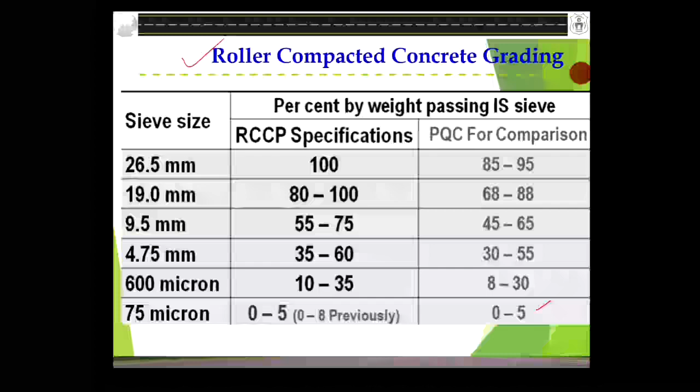These are the different changes and new supplements that have been incorporated in the latest revision of the MoRD specifications.

So with this, let me conclude. This is one slide to give an idea. As we know, we must be very proud that we have constructed about 7 lakh kilometers of rural roads in the country today, and we must be very proud. So what is the real rural road indicator of success?

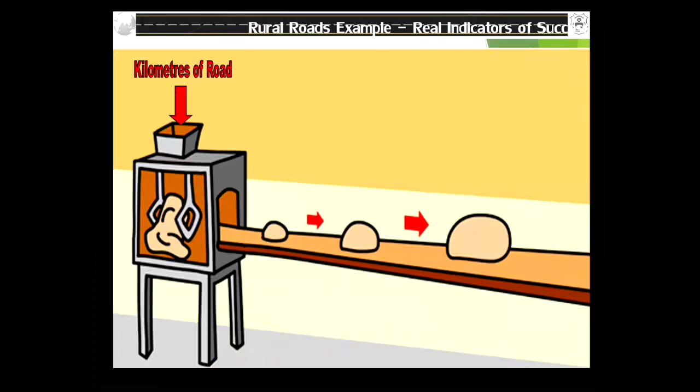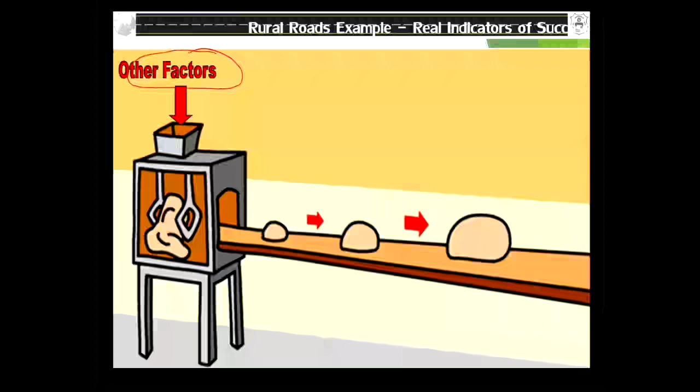Whenever I present a topic on rural roads, I like to show this slide. Let's assume we are constructing 1 kilometer of road. In addition to that 1 kilometer of road, I'm also considering other factors, socio-economic or environmental, weather, or cost factors. This is my grinding mixer, and it is grinding now. The idea is, if you try to provide connectivity or accessibility to habitations that were not connected earlier.

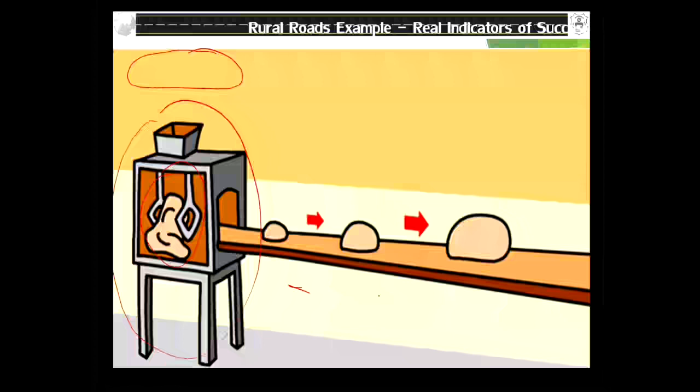So what is the real indicator of success for rural roads in these terms? This is my success path now. This success path will give me the output: time, education, cost, environment, health, trade, jobs, and profits.

That's why I said, in my opinion, it is very easy to design and construct a high volume road rather than a low volume road, where we are continuously striving for a cost-effective methodology without compromising quality, and providing for the daily needs of rural India or rural communities.

So these are all: time, education, trade, cost, environment, health and jobs. These are all at an individual level. Each one of us gets a benefit.

But we are celebrating the 75th independence, Azadi Ka Amrit Mahotsav of 25 years. We are all striving, all governments are trying, for one common single cause, which is nothing but poverty reduction. So our rural roads will play a very critical and major role in terms of these real indicators of success.

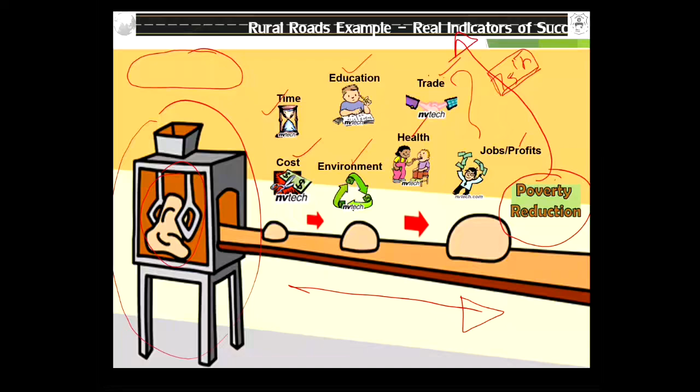With this, I thank you very much for your kind attention on these lectures. I am very happy to...